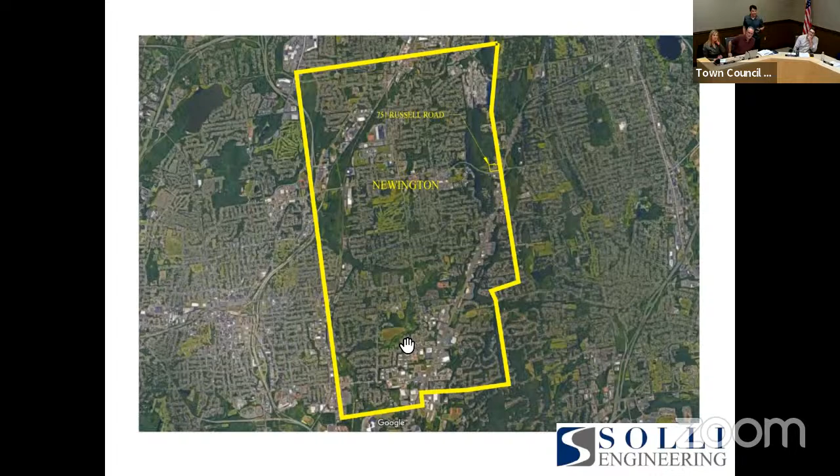Yep. Go ahead and share the screen to it. Should say PDF there. Share on that. I thought your boy was Caleb. How do I, you have the clicker? Coming up, you pull in. Zoom and everything. No, he should be able to. Oh, give me one second. Where? At your shop. And they're done. Try it now. There you go.

All right, we're good. Okay, now we're cooking with gas. So again, we're here tonight to talk about project 751 Russell Road. We're very excited to be here. Obviously, the property has some history. It's been approved for a number of different projects in the past, and development has essentially had its challenges.

So it's currently undeveloped, and somewhat disturbed as a site. You know, we're excited to be here with Michael Frisbee from Noble Gas, because what he's doing is, we believe, really kind of the future of transportation. We're not talking about your traditional or conventional gas station. It's so much more than that. And the proposed project includes...

I'm just going to give a high level overview and then pass it over to Luke to talk through some of the specifics. The project includes a proposed gas station with convenience store, with your traditional fueling canopy, but also Mr. Frisbee and Noble is very focused on the future of where transportation is going. So this application actually includes a separate EV charging canopy.

It's a very similar experience for people who go to a gas station today to fill up their car. They get under a canopy and pump their gas. We're creating an environment and a place where if you have an EV electric vehicle, you can have a similar experience. You can pull up under a canopy, stop, and plug your electric vehicle in. Then you can go into a facility that's much more than just your typical convenience store you may find at a traditional gas station.

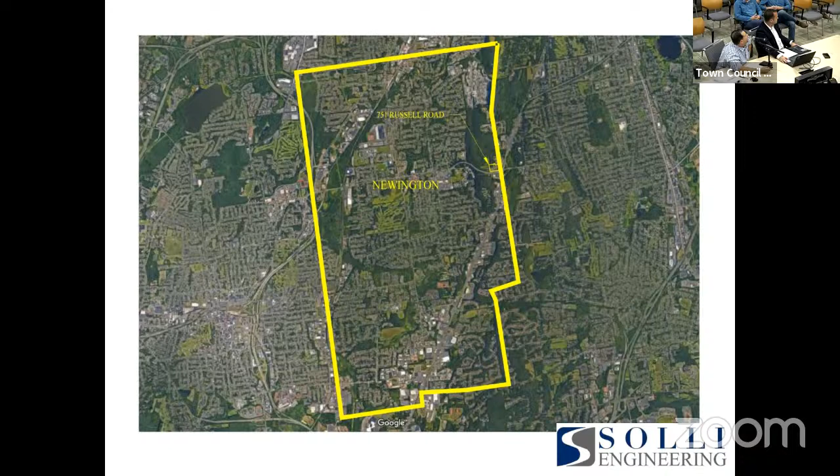Kevin gave a good high-level overview, so I just want to kind of orient everybody as best as we can. I don't think there's a pointer on here, but shown above you is an outline of the town of Newington. The project is located just west of the Berlin Turnpike at the intersection of Russell Road and East Cedar Street, kind of centrally located on the eastern side of town.

So we'll take a zoom in look. Just to orient everybody here, Berlin Turnpike is the major arterial you see on the right side of the screen there. The property is abutted on the east side by Russell Road and the off-ramp to the Berlin Turnpike southbound. East Cedar Street abuts the property on the south side. Then there's some vacant open space, I believe owned by the town, to the west side of the project. And in the northeast corner, we abut a Jensen machine shop.

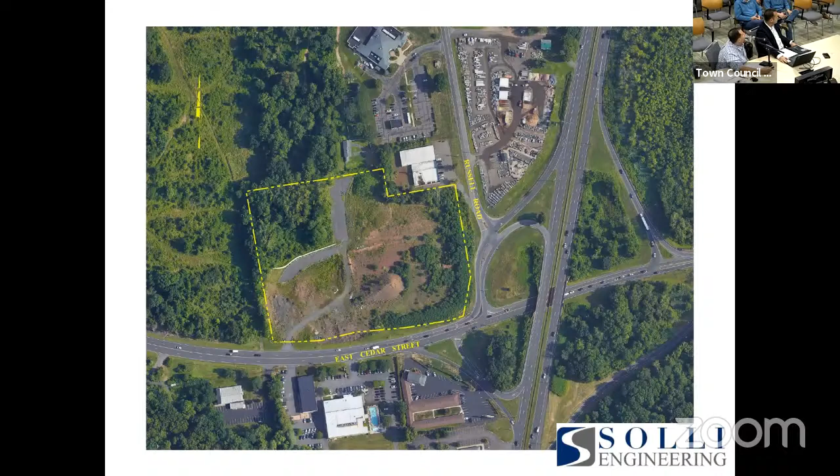As part of our site plan here, as Kevin had noted, we're proposing a gas station, which is an 8,384 square foot convenience store with a coffee shop user. It has a sandwich shop user and an ice cream shop user with an adjacent outdoor patio area. The gas station itself, just west of the convenience store building, will be a 12-pump gas station, and then just to the west of that, there'll be a covered canopy for EV charging stations with capacity for up to 12 EV chargers.

Just to the north of the gas and EV canopies is an automated car wash. And then all the way to the southeast corner of the property, that larger building is the EV showroom and service center that Kevin had discussed. That's a two-story building. Everything else is a single story.

Access to the site is provided via a proposed full movement signalized driveway located on the southwest corner of the property, on East Cedar Street. We're also proposing a smaller secondary access in the northeast corner of the property on Russell Road, which kind of shares access with the Jensen machine shop.

One item to point out regarding access is as we went through the review process with the town, very recently we had some discussions with the owners and operators of Jensen Machine. Initial plans had proposed that their driveway access, which actually comes through the subject property and is controlled through an easement, be modified to interconnect with our driveway. Through discussions with them, they had some potential concerns about that geometry.

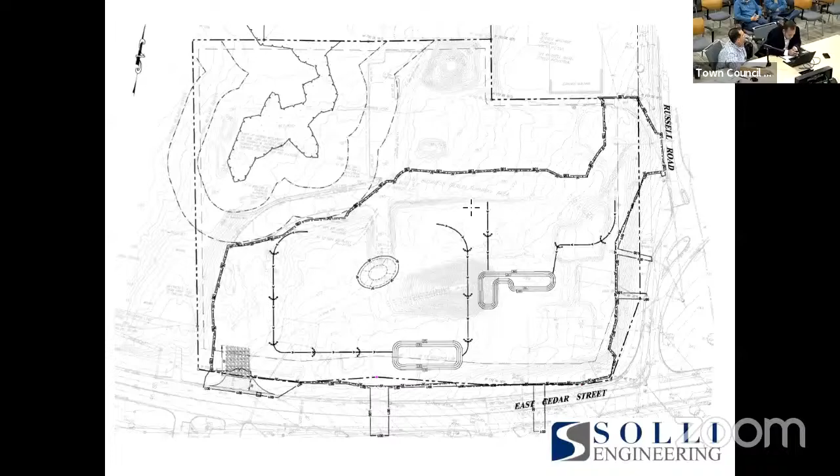We have two sediment traps with temporary drainage swales that collect runoff on site and channel it into those ponds, so that water, solids, and soil can settle out before proceeding off site.

In addition, any existing and proposed catch basin structures will be fitted with silt sack inlet protection so that no silt migrates down into the state drainage system.

In terms of utilities, at a high level, the site will be serviced by all public utilities. Gas, electric, and telecom are all proposed to come off of East Cedar Street, and the sanitary sewer will come off of Russell Road. There are sanitary manholes on our side of the road there.

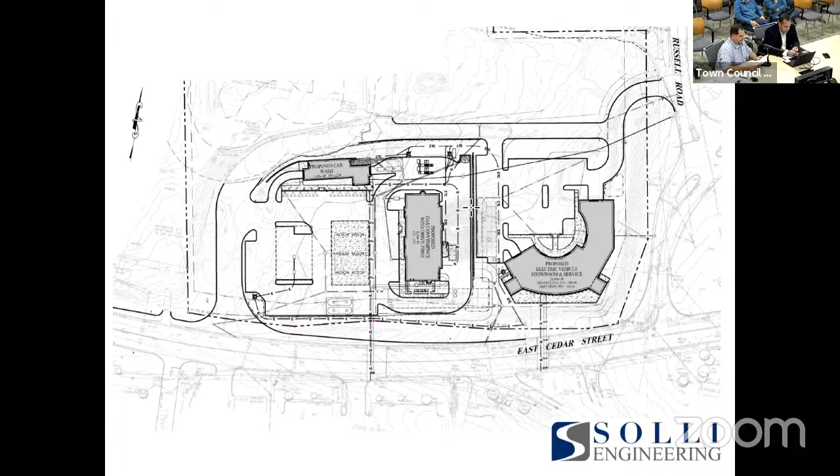In terms of landscaping, we did provide a detailed landscaping plan. Our goal is to generally specify drought-resistant plantings, with a target of 80% native species to the northeast.

Any disturbed areas and steeper slopes will be reseeded to establish lawn where there isn't actual shrubbery, trees, or mulch. We also have a special erosion control seed mix for some of the 2-to-1 and 3-to-1 steeper slopes on the site.

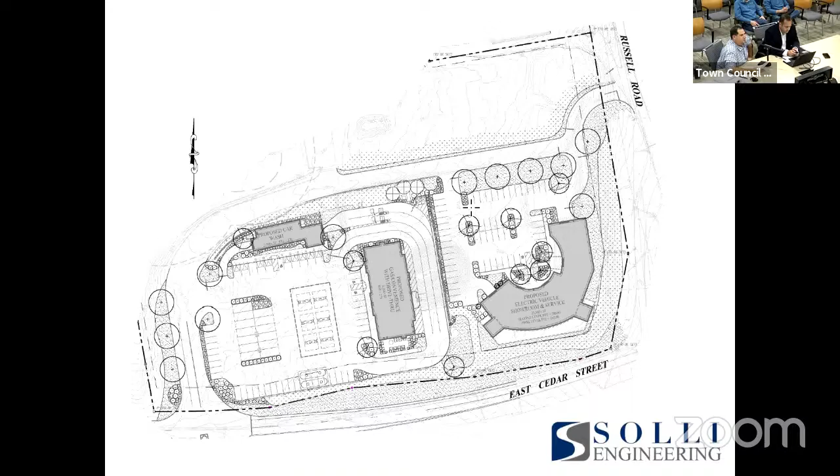In terms of lighting, we provided a detailed photometric and lighting plan. All the site lighting fixtures are designed with energy-efficient LED lighting.

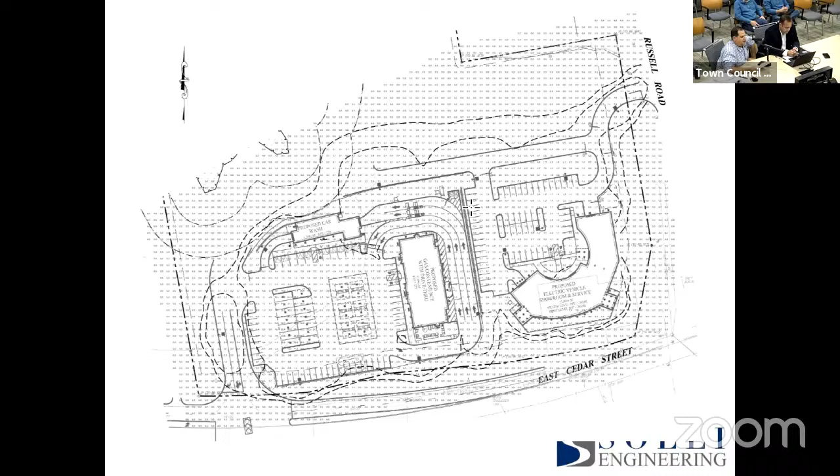They are dark sky compliant and shielded in order to reduce and minimize glare, and to try to prevent spillover at the property lines to the greatest extent practical.

We'll go on to a high-level overview, and if there are any more detailed questions about the operations, Mr. Frisbee is here to answer those.

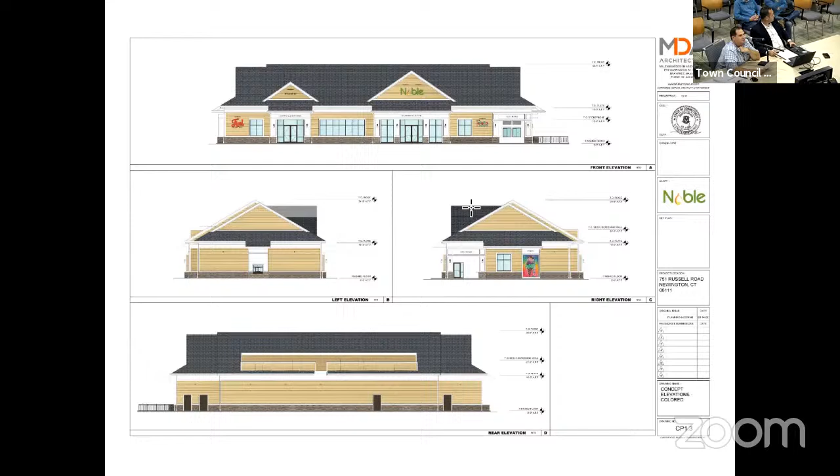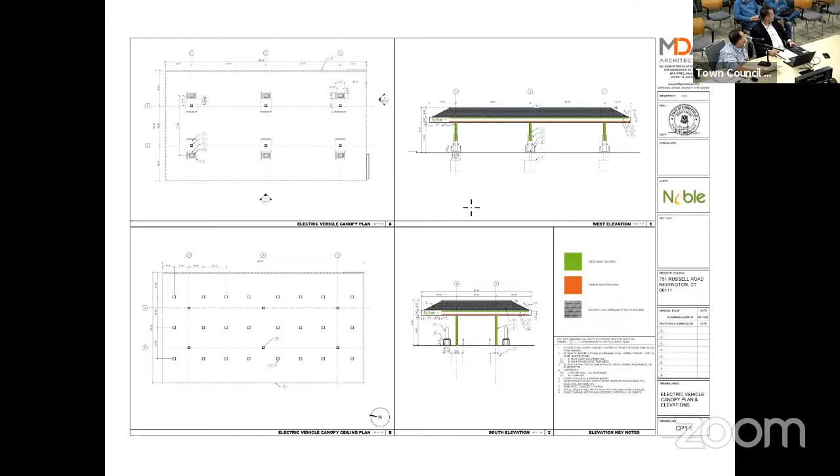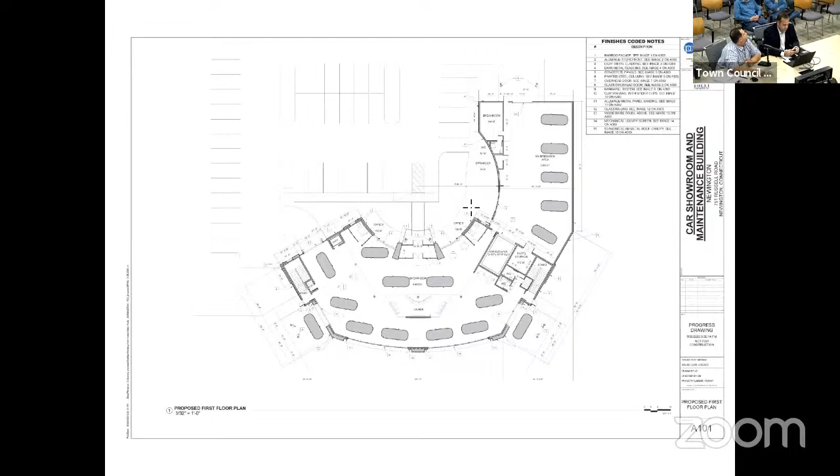Next, the floor plan for the EV showroom. This is the first level, with likely two tenants available to show types of electric vehicles on the bottom side of the floor plan. To the top right would be the EV service center, strictly servicing EV vehicles, no hybrids, no gas-powered combustion engines or anything like that. It would just be service.

This would be a good time to touch upon a question from the planning comments about clarification regarding the maximum height allowed per code. This zone, the BBT zone, allows a maximum height of 35 feet. As dimensioned on our drawings, the height to the flat roof itself is 33 feet high, so by the letter of the code, it is in compliance with the height requirements of the zone. However, there are some architectural parapets at the top designed to screen some of the mechanical equipment.

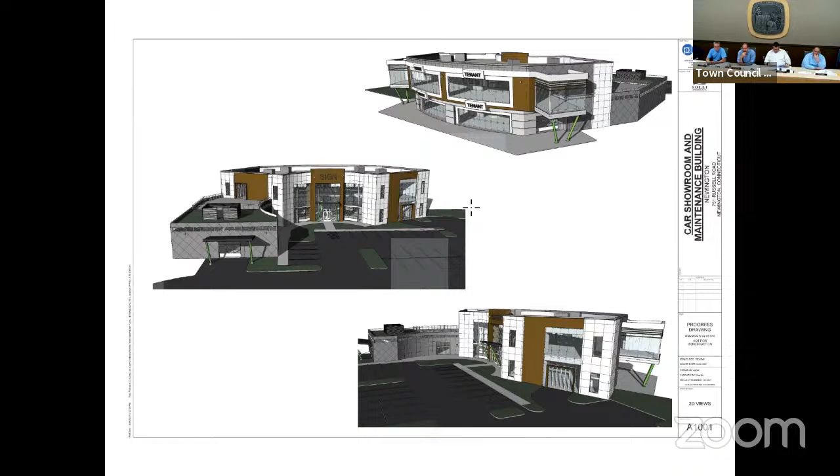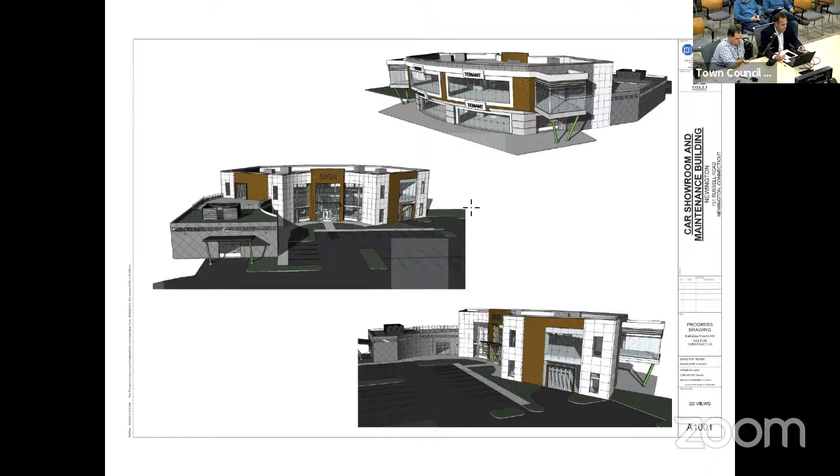One quick point regarding the EV showroom. We know this is a new and exciting type of concept, and we believe strongly that with everything transpiring from a transportation and renewable energy standpoint, this is the future. We know there's been concerns, and the town received some correspondence from people potentially concerned with this type of use. I want to clarify that the proposed facility would operate in full compliance with section 8-12 of the CT General Statutes. This is not a proposed EV dealership, not a place to buy or purchase electric vehicles. This is simply a place for EV service, which is allowed in the regulations, and a place where there could be an educational opportunity to learn more about and see electric vehicles, staying with the times regarding the future of transportation.

And then there is the intersection of our driveway on Russell Road, the intersection of Russell Road with the Berlin Turnpike southbound ramps, and the two intersections of the Berlin Turnpike southbound ramps on East Cedar Street. There is actually a way to get to Berlin Turnpike in two directions over there.

As far as existing conditions go, we took traffic counts in July along our study area intersections, and we did tube counts on East Cedar Street. The existing average daily traffic in July was about 28,400 vehicles per day along East Cedar Street in front of our site. The peak periods of the roadway generally occurred between 7:30 and 8:30 in the morning, 5 to 6 p.m. during the weekday, and on Saturday between 11:45 and 12:45.

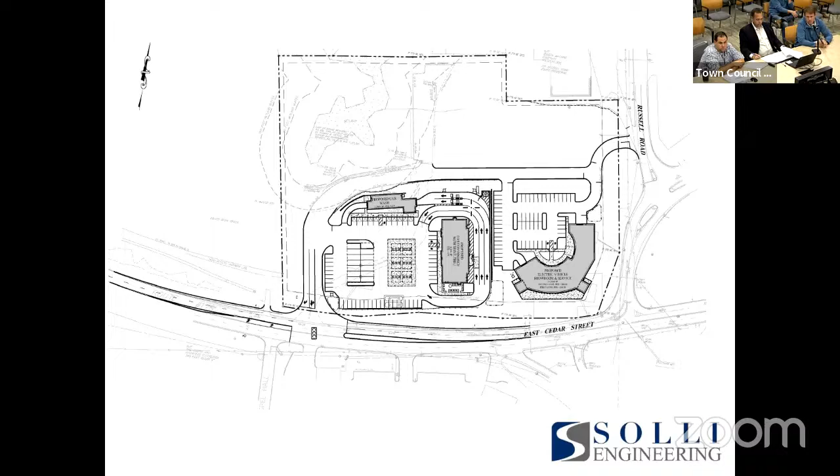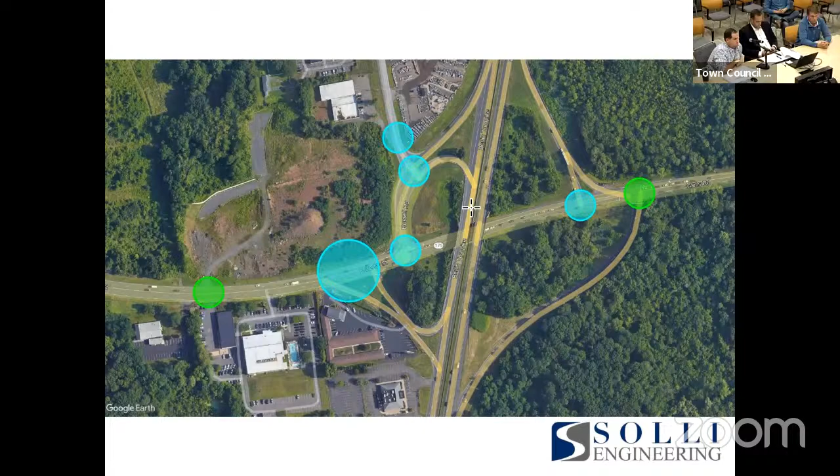Yeah, I mean, based on what we see, the larger draw could be coming from the south side of the site. Any other questions from commissioners? Yes, John. Chairman.

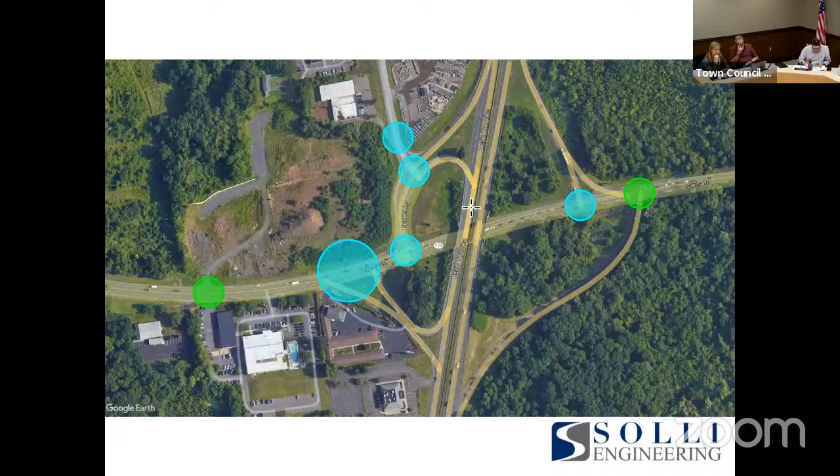Yeah, my question is just about the EV showroom. I'm just trying to figure out how it's set up. It indicates in the plan that as a tenant, will you be leasing that space to electric vehicle companies to show? How does that work? I'm just curious.

So that's a great question. I am building a Noble Travel Center in Sturbridge, Massachusetts right now, and next to that I've created a nonprofit to build the first electric vehicle discovery center in the United States. I partnered with a company out of Toronto called Plug and Drive, who has a discovery center up there. We're using their platform to make it better here in the Northeast, to allow folks to come in in a non-sales environment to learn and understand electric vehicles, the future of transportation.

I was just in Detroit last week. There was an Automotive USA conference, and I was working with all the different car manufacturers, and they're partnering with me at the EV Discovery Center. Part of that agreement is that they're going to provide vehicles as well as money to help support the nonprofit for the education side of it.

The idea behind the showrooms - and this won't be the only one I'll do - is to allow folks in Connecticut to actually see, touch, and feel those vehicles. There's no specific agreement in place for the different car manufacturers, but at the conference last week, all the car manufacturers are making multiple lines for electric vehicles. It's all coming, and they need a place to show that. Now they can show them at their existing dealerships, but they could also show them in the showroom so they can compare.

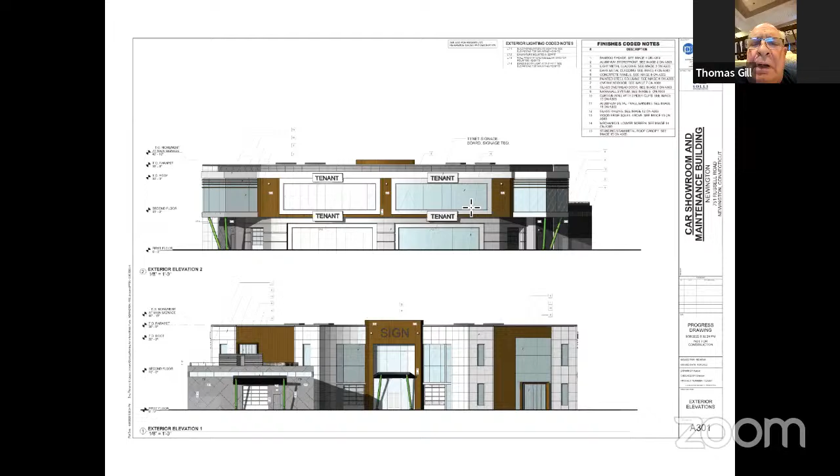As far as the canopies, both the gas and the electric, is there any thought of solar panels on the roof area? That's another great question. Yes, we are working with a solar company now, and our canopies are designed to be able to support the load. The challenge with solar, in my opinion, is I would consider doing it if we had battery storage to go along with it, and the technology, there's a lot of new technology out there, I don't think it's quite there yet. But we're designing to future-proof so that we can support the solar if we find battery storage that will help support the EV chargers as well as the balance of the facility.

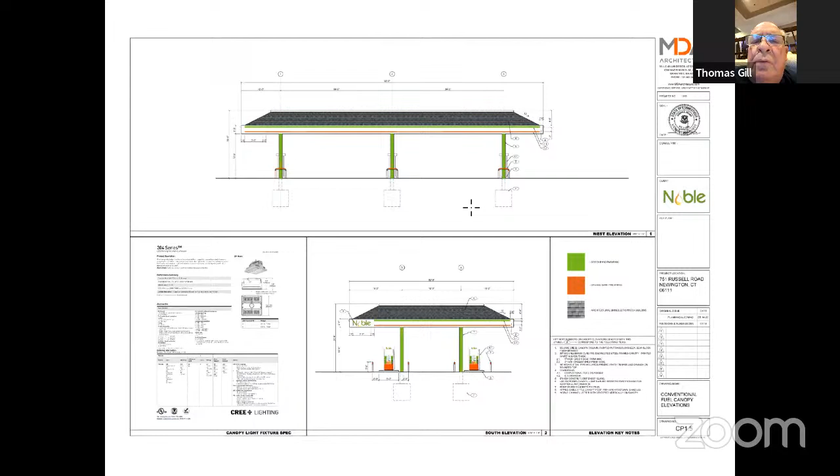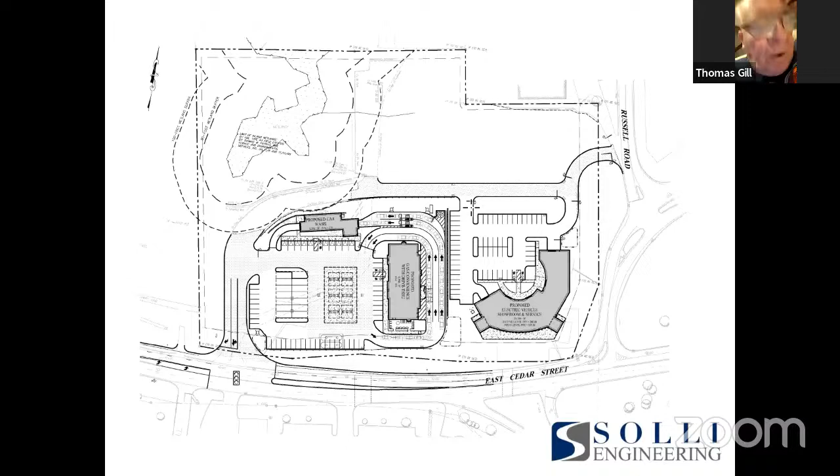Okay, good, thank you. Also, the back driveway off of Russell Road that goes up, it looks like in some of the drawings that it connects with the driveway coming off of East Cedar. What is the real plan there?

Sure. As I mentioned previously, our initial application had us proposing some modifications to the existing access from Jensen Machine. Through some conversations with them, they had concerns about some of that geometry. So the plans before the commission tonight, up on the screen, readjust that, so we're able to maintain the Jensen Machine driveway exactly as it sits today. Their operations aren't impacted from a geometric standpoint. There are really steep grades out there, so trying to make those work was a little bit challenging.

But we feel that the plans before the commission this evening, shown on the screen, maintain that existing drive in its current configuration, and then adjust the location of our proposed stop-sign-controlled driveway on Russell Road. As part of our traffic study, we did a very exhaustive analysis of how those intersections operate, and we believe that even with this tweak, it's still going to operate effectively. And again, as I mentioned before, the DOT has ultimate review and approval of this stuff anyway, so we'll have an additional set of eyes, and hopefully the commission can take comfort in that.

I think he might have meant up on the back side, which right now is a big retaining wall. It shows on your drawing—are you connecting it up on the top left? Or is that... You mean the drive that goes behind the car wash?

Commissioner Gill is asking. Sure, so I can touch on that. I think I can maybe provide some clarity there.

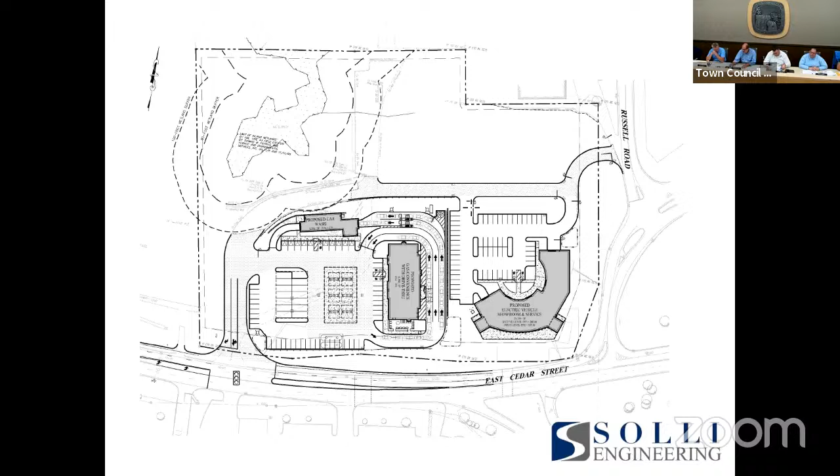Just wanted to point out the obvious, which is that there's 3 gas stations within a mile of this. Also the state EV charging stations down the street, maybe 2 miles away, less than that. There are plenty of them, and I rarely see more than 5 cars there at any time. In terms of there being a car wash, there was just a new car wash on the Berlin Turnpike that opened recently, probably within the last 6 months.

I come from Newington and take a left onto Russell Road, and my heart is in my mouth every time I have to make that left turn, because people coming down from Newington trying to go north on the Berlin Turnpike don't slow down for traffic stopping on Russell Road to go left. They see it as a straight way to go north on the Berlin Turnpike, and it's very dangerous as it is. I don't know about traffic studies that have been done.

At one time there was a presentation for that property for, I guess, assisted living or senior living, and there was a traffic study, and it was rejected in part because of the additional traffic. I think part of the reason the DOT changed the way traffic went was you don't stop there anymore. There used to be a stop sign there to go into Newington off of the Berlin Turnpike, and traffic just keeps going now.

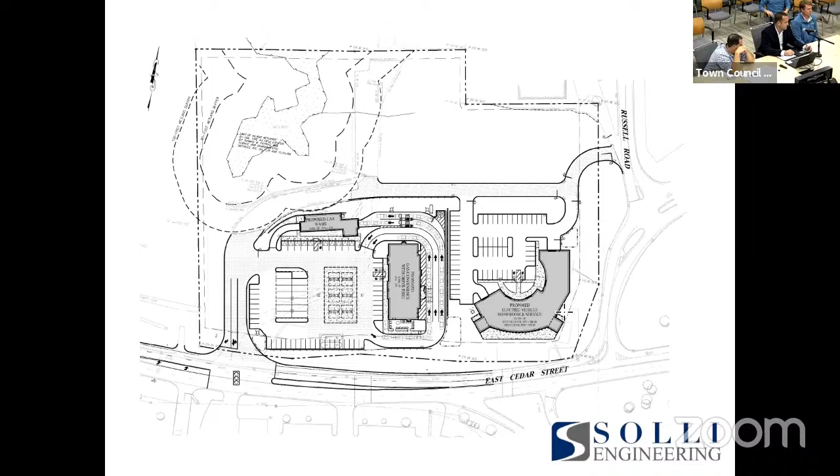If there's no other questions, I would entertain a recommendation to close the public hearing for petition 41-22 and 42-22, and move it to old business. Gotta do both of those.

Motion made by Commissioner Woods. Do I have a second? Seconded by Commissioner Trista. Any discussion? All those in favor? Aye. Opposed? Anyone opposed? Motion carries unanimously.

Okay, the next thing on our agenda is the approval of minutes. We have minutes for 10/12/22, regular meeting and special meeting. I'll entertain a motion for approval of the minutes.

Motion made by Commissioner Woods. Do I hear a second? Seconded by Commissioner Havens. Any discussion? Any corrections on the minutes?

Minutes from 10/12 - I didn't bring it with me, but I think they said 2020 for the year. There is a correction on the date of the minutes, and we have noticed that, and we will ask the secretary to correct it. So one date was 12 and one date was 13.

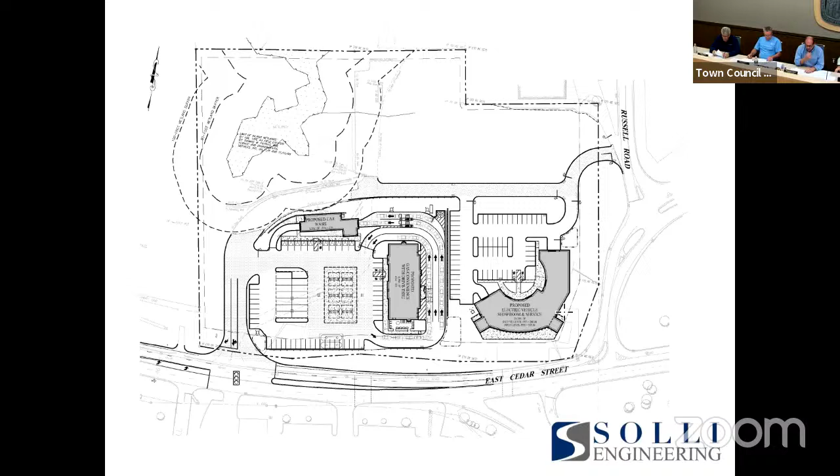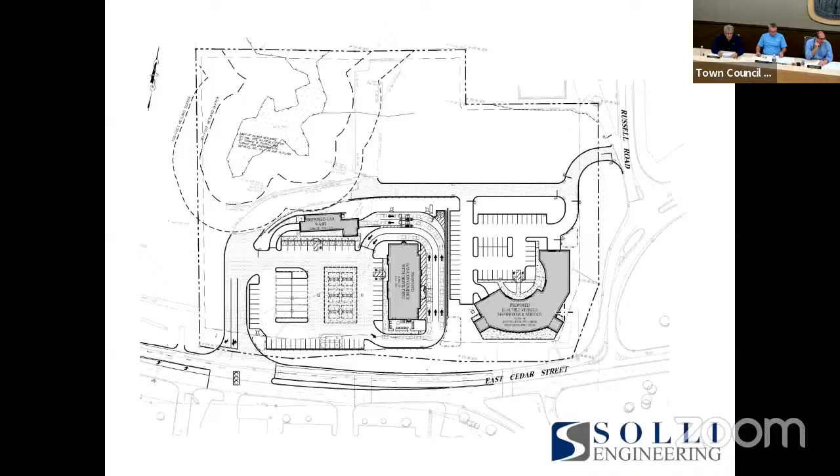I had one question - forgive me for going back to get this answer. I noticed there's no detention pond on this. Is it - are you doing it all underground? Okay, thank you. Any other commissioners have any other site plan questions concerning their site plan?

Okay, we're going to go to old business. We need to move this to old business for possible action. Is it on old business? It is on the agenda. Go ahead of us.

Okay. So, Mr. Chair, as you can see in the way of staff report for the petitions - all three, 41-22, 42-22, and 40-22.

In general terms, the planning department and myself are in support of this application. I think the proposal - 7 years ago this site was approved for a larger development, larger in a sense of build out, larger in a sense of impact. And if you think even in a sense of traffic impact, the development proposed right now generates perhaps more traffic, but it's traffic that is, for the most part, gas station and car wash in particular, are generators that collect traffic that's already on the street.